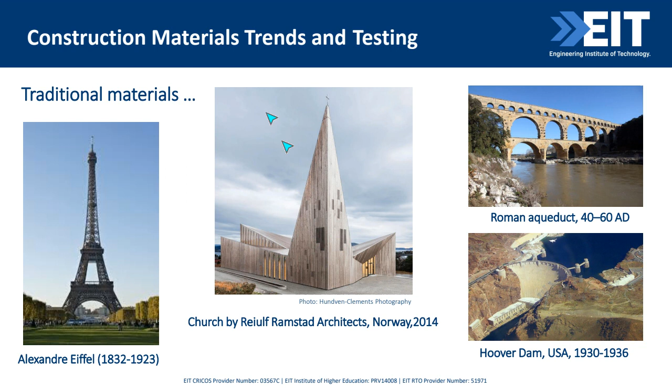This is just to give an idea about how traditional materials can evolve over time. New technologies in this area are coming every day. That's why we need to work collaboratively with our colleagues, architects, so we can come up with very special types of design. Our main idea when talking about materials: on one side the design aspects, and on the other the selection of materials suitable to a specific type of project.

This is the reason why, from my point of view as a civil structural engineer, we need to understand material characteristics, material behavior, how we can evaluate concrete properties in order to understand what's going on in situ. So this is what we'll be talking about.

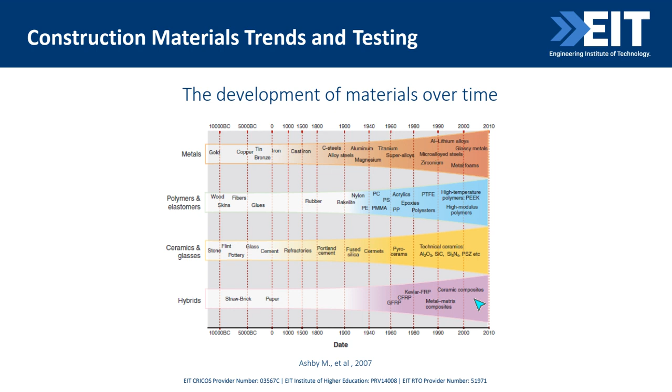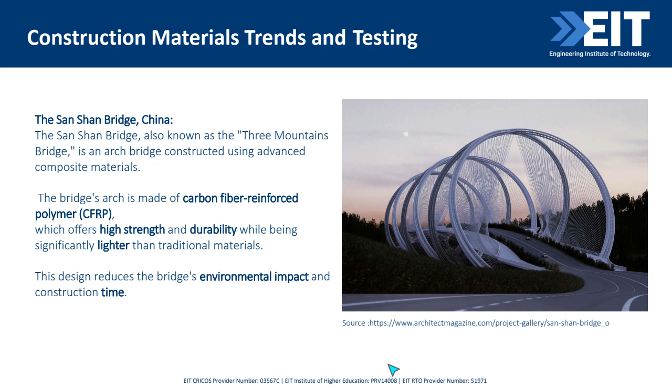Here we can see it's about offering high strength and durability, but we need to think about the weight of the material - otherwise we cannot accommodate this type of design. Another point we need to think about when selecting materials is more and more about environmental impact and construction time. These are our main challenges as engineers nowadays.

So we have a huge responsibility here about building up sustainable infrastructure. Another point I really like is sustainable cities and communities. When you think about sustainable cities, more and more we can see around the globe in different countries issues around housing, right? Demand of construction for new housing. This is our responsibility at the moment you make decisions about a new project. If you don't think about environmental impact and how you can live in a sustainable city, there's a lot of pollution, depending on the type of material you'll be working with.

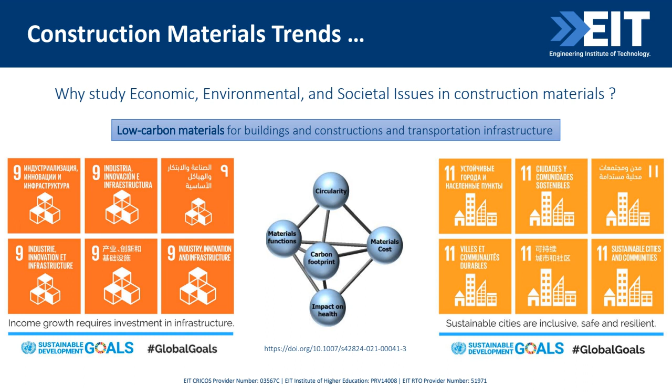So this is just to give you some initial enlightenment regarding United Nations Sustainable Development Goals. I encourage you to familiarize yourselves, because this is what we need to deal with as structural and civil engineers, construction professionals, architects. My point here is about low carbon materials for buildings and construction, and transportation infrastructure. If you only target one goal here, that's a lot you can contribute. So this is to give you some ideas about the sustainable development goals.

This is the part where I'd like to create your awareness, because with materials trends, it's about carbon dioxide emission, it's about energy. The energy sector, our industry, construction engineering - they blame us a lot regarding carbon dioxide emission because of the production of cement and concrete later on. So when you study construction materials and engineering materials, applicable to civil, mechanical, electrical, if you want to work out the entire life cycle of your product, this is one of the key points: embodied energy. I'm not going to go into the details of how to calculate embodied energy, but it's an opportunity to open your mind, and later on you'll be able to dig into it.

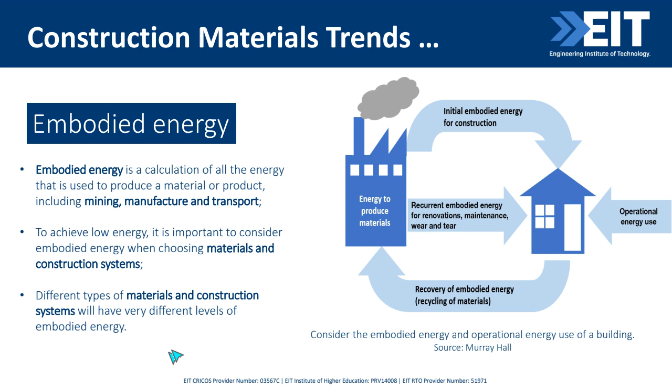So we have the initial embodied energy for the construction - here you can see the energy to produce materials. And then you have your building, with other points like operational energy use. Then at end of life, it's possible to close the cycle - let's say you have the demolition of your building. You can reuse your material, like recycled concrete or construction demolition waste. So you can mitigate and recover part of the embodied energy from your material presented at the very beginning. Different types of materials have different levels of embodied energy, but this concept is becoming more and more common when we are asked to select materials.

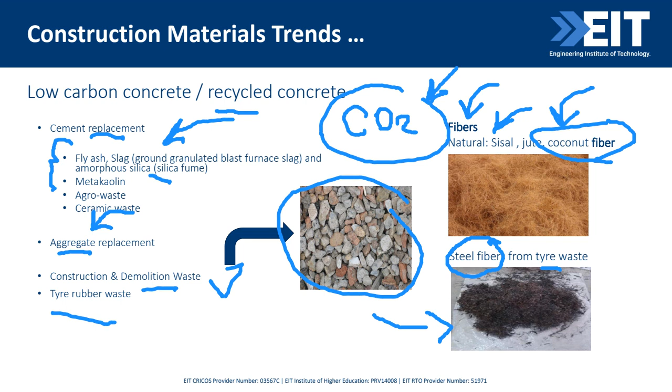When you think about concrete, you think about cracks. When we incorporate fibers in our concrete... yeah, good one, Mary, banana fiber. This one is new for me, but I will search more about it. I'm always open to receive new inputs if you have them.

All these new materials are coming to our life, to our projects, because more and more we have composites. It depends on the type of application. What is composite? For example, natural composites, when you have more than one material combined, ingredients, let's simplify. Timber is considered a natural composite. Bones are composites because they have more than one ingredient to form the final product. And we can have man-made composites.

Yes, the bonding, Sami. So composites, what's the main purpose? To combine more than one type of engineering material - timber, paper, concrete, reinforced concrete. So these are the man-made composites, and it's not new, ancient times there are some applications. Nowadays, we have modern types of composites, like fiber reinforced polymer composites.

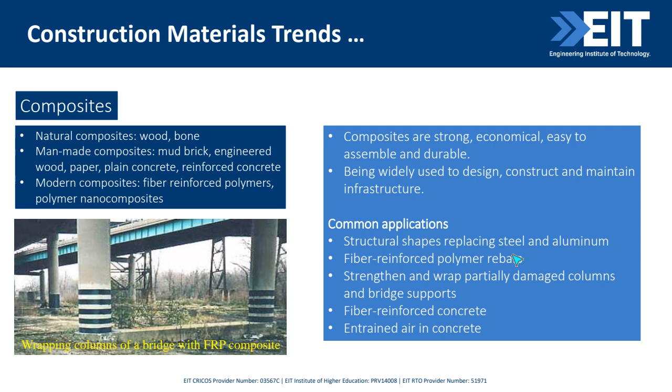It's a shame if someone asks or talks to you about a new material like fiber reinforced concrete, fiber reinforced polymer bar, or glass fiber reinforced concrete, and you don't have a clue, you don't have any idea about this. So it's always an opportunity for us to absorb more information. Regarding the trends, I'm gonna give you your answer at the end.

Okay, Raj? So here we have other trends. For now, I'm just exploring all the trends regarding use of polymers, which you can combine with cement and use in pavement applications to improve stability. Reuse of asphalt is something you can do to produce new asphalt, and definitely it's gonna mitigate environmental impact. If you think about timber, more and more we need engineered timber showing higher strength.

That's why you have this type of composite, cross-laminated timber, which can be used in buildings as structural elements. So another point - when you select materials, step number one is to understand if this application is going to have a structural purpose or not. If not, you can be a little bit more relaxed, but if there is a structural purpose, you need to double check your attention regarding the design aspects.

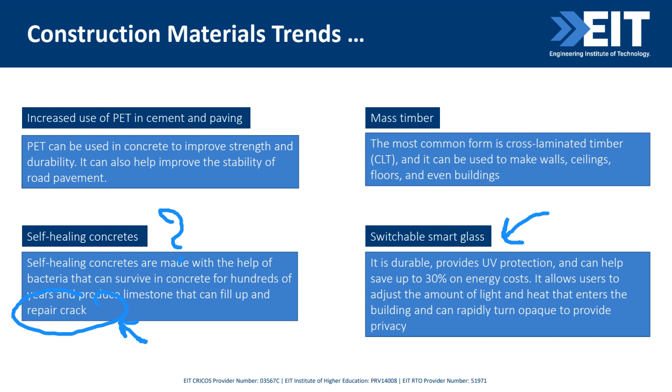And here is about switchable smart glass, another new material, very new. Nowadays our concern is about UV protection, and this also connects to, remember at the very beginning, the greenest building in the Netherlands about energy efficiency. So here you can see one of the alternatives is the application of smart glass, saving 30% on energy cost. This information I retrieved from literature, and at the end you're gonna have all the references for you to explore a bit more in your own time.

I'm not saying that you need to download standards every time, but familiarize yourself. At least go through the standards website, type the type of material you are working, and you're gonna see how many standards come up. Here is one example from the Australian standard, the concrete structure. And when you have one standard, you have so many others to refer to. So familiarize with standards all the time when you need.

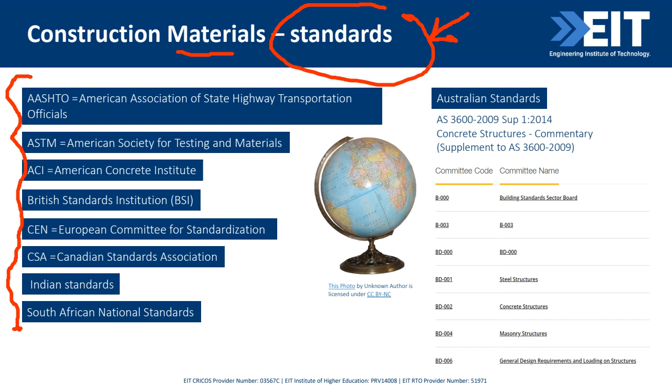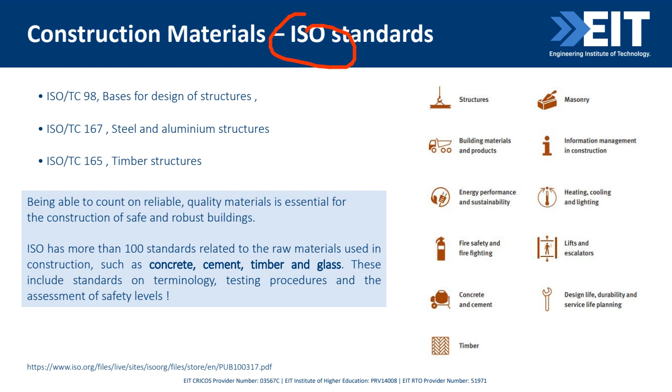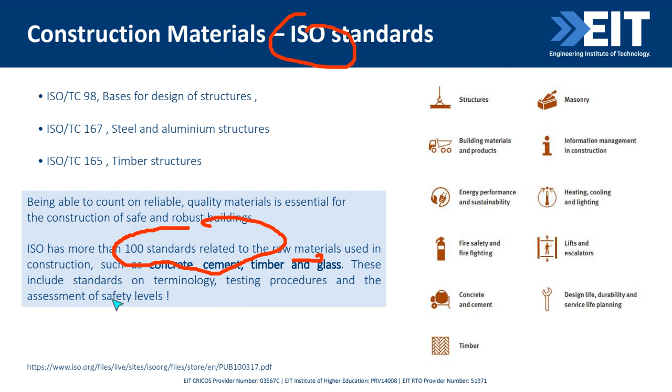And you have the ISO standards. Just to give you some idea about materials and ISO, we have more than 100 standards related to raw materials. What type of raw materials am I saying here? Concrete, timber, glass, cement. All these are available for the structures, masonry, building materials and products. I just organized it here for you: concrete and cement, timber, because at the end of the day, these standards will guide us to conduct the test and ensure the characteristics of your material. So we'll have testing procedures, terminology, and that's why we need to think about safety aspects when working with construction materials.

And talking about safety, this is the main concern, right? Materials, construction materials, engineering materials, properties. That's why this is something we'll be discussing here today. As engineers, as construction professionals, we need to know the difference, right? This is the fundamentals. When you have selection of materials, we need to know what you want regarding physical properties, mechanical properties, chemical, electrical, magnetic properties, thermal properties, for example.

And this is a very interesting diagram, if you can see here. It's normally when you have more than one property, we can think about correlations. Remember at the very beginning I mentioned the materials family, metal family, ceramics, and here we can hit technical composites, hybrids, polymers. So when you need to select materials, here is an example when you have modulus of elasticity against density. So depends on your project design.

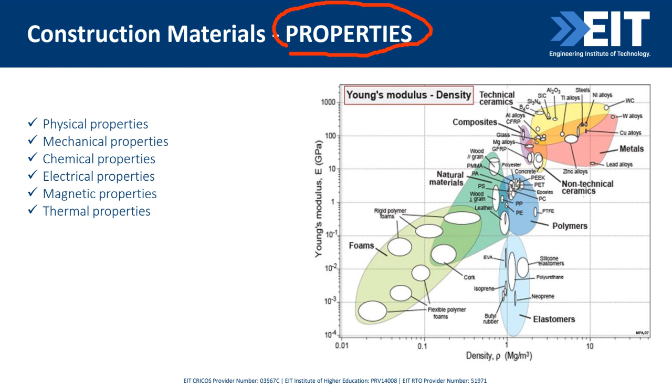You need to familiarize with this type of diagram regarding if you're looking for a lighter material but showing high Young's modulus of elasticity, right? So this is quite difficult. Pretty much when you have here the metal families, the alloys, what we can see is higher density and higher modulus of elasticity, if you think about the design. So I will not go further with this. It's more to explore what type of properties we need to familiarize ourselves with.

And here are some examples when you have thermal properties. Here we can see very common, sometimes we need to think about the thermal loads in our project, and that's why we need to understand materials, which one shows high conductivity, lower conductivity. So it's important to characterize materials against thermal properties, and here chemical properties.

Chemical properties, I understand, majority of times civil construction professionals, we don't like chemistry, right? So chemical properties are critical. We need to like it more than ever because it's about durability, deterioration, okay? So let's say here, we even need to understand the properties of water as a material if you are producing concrete.

This is my favorite, that's why I'll talk about this one. Salt water - do you think it's a good idea to add salt water in our concrete if you're gonna work with reinforced concrete? Do you think it's a good idea? Yes or no? No, definitely not. Okay, and why? This is the next question. Why? No, right? Definitely not.

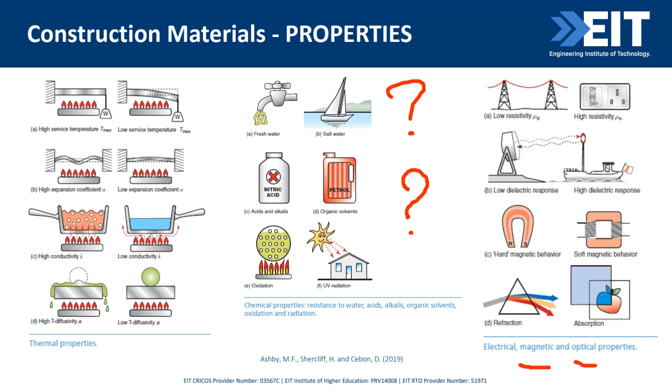And we have also magnetic properties, optical properties. All these characteristics are important. Corrosion, definitely.

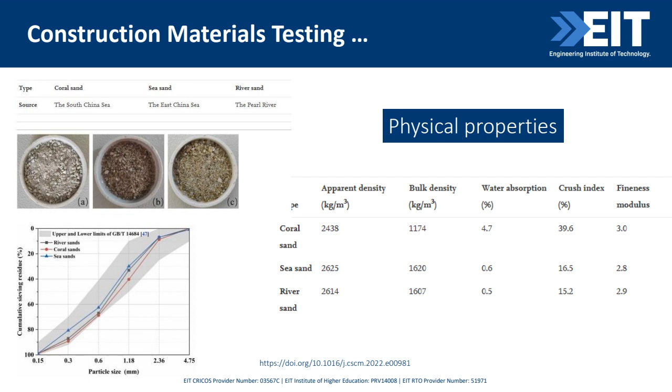When you work with sand with high level of water absorption, the sand absorbs water, and then you need to adjust this at the moment you are mixing concrete, to not add more water into your concrete. So that's an example of why we need to familiarize ourselves with testing.

The other one, let's have a look at the chemical properties. And same here, as we discussed before, we have all the oxide compositions here. We have Portland cement, coral sand, and sea sand.

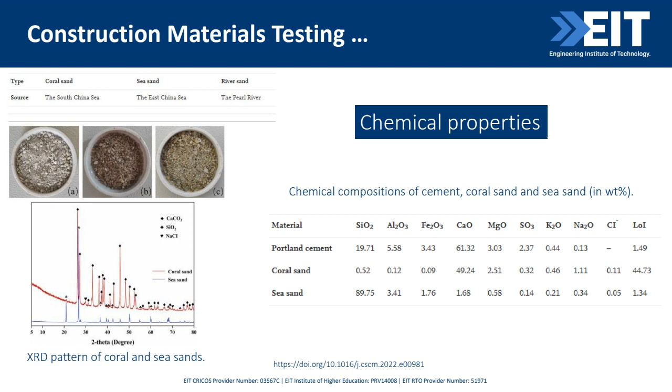Why is it important? Because we don't want chemical reaction between Portland cement and sand. We used to say aggregates are inert, meaning no chemical reaction. So by doing this type of analysis, we need to work collaboratively with our colleagues, chemical engineers, and then we can understand which material is most suitable for our project, or not. This is the point when covering these chemical properties, and this can also influence the durability of your concrete later on.

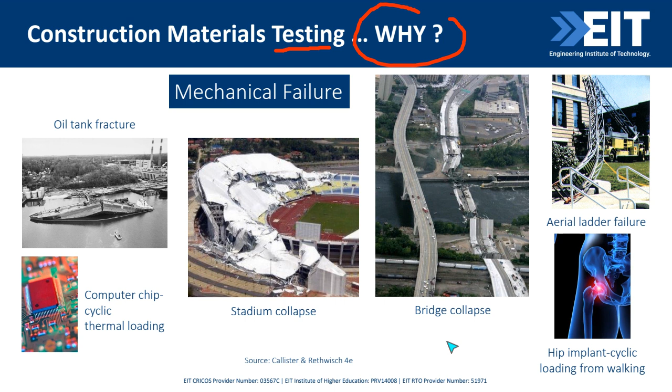Now we come to one of the main concerns: why we need to be concerned about construction materials testing. Because we don't want mechanical failure. There are so many examples around the globe in different countries: stadium collapse, bridge collapse, oil tank fracture. Even with these types of failures, some can be predicted, but some not, like a natural disaster. It is our job now to design more resilient structures to cope with natural disaster.

Not easy, but step number one when selecting materials is about mechanical properties. When you talk about failure, straight away it comes to mind. This is a huge question - some of you are totally familiar with this, some maybe not. But how do materials break? It's simple: if you apply load, a material with enough strength will not break, but after a certain level of load, the material will break. This is the example of a compressive test with concrete, and how materials break.

When we do compressive strength testing, we apply load, and what we can see is the cracks are formed and the load increases until a certain level. When you do this type of test, we are concerned with the material's behavior.

Stress strain diagram - you are familiar with this, right? This one is for concrete. Let's say you apply load, you can obtain displacement, vertical and horizontal. From the vertical displacement, you can calculate strain. So you apply load until a certain level, you have the linear behavior, and then straight away after the maximum point load, maximum stress, you can see the collapse.

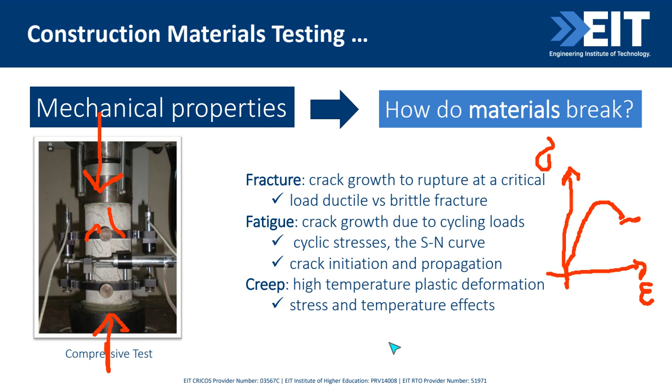Why is it important? Because by doing this type of analysis, even with the simple compressive strength test, we can identify if our material is a ductile material or a brittle material. And other characteristics like fatigue and creep, we need to observe and understand how materials break.

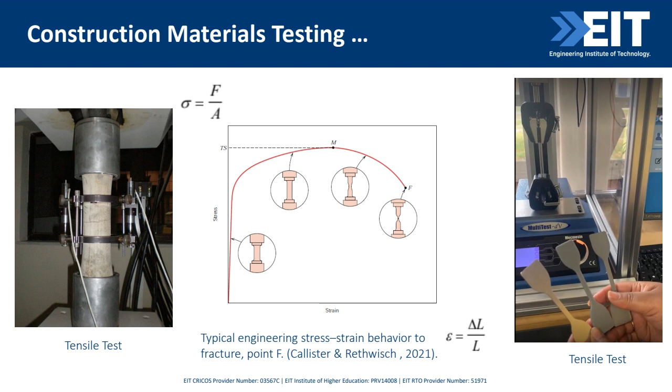Another type of test, as Fred mentioned, is the tensile test. There are specific samples, as you can see here, depending on the type of material. We have specific equipment and samples that we can use. By applying compressive load or tensile load - as you can see here, this is tensile load in concrete - this is the direct test. It's very hard because you apply direct tensile test; not very easy because we need these special types of devices.

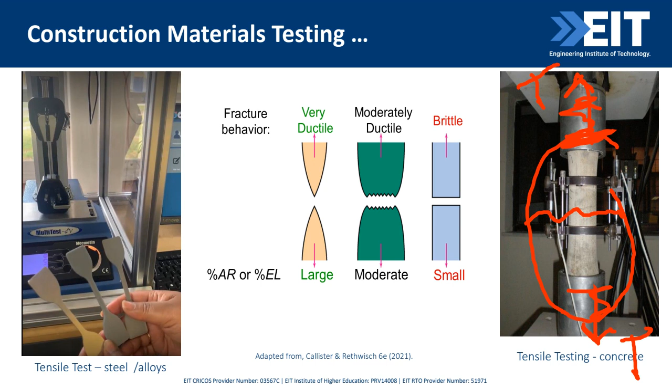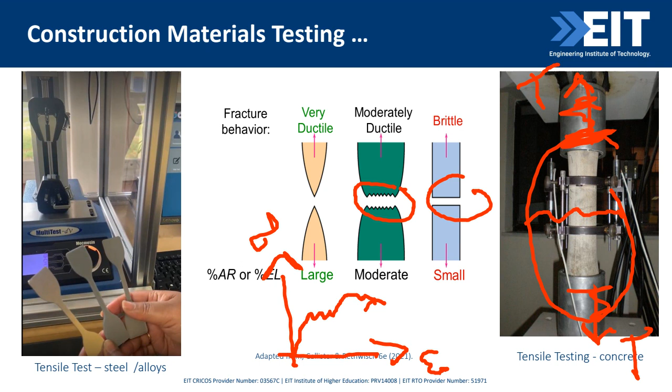When you have steel, we have the yielding point. For steel, when you conduct this type of stress-strain test, normally you have the linear part, the yield, and then the collapse. This gives us the idea: brittle material, straight away you have the fracture, you don't have time to run away, the material will collapse. Then we have moderate ductility, more or less with concrete, and very ductile, pretty much steel. These are the things we needed to familiarize ourselves with.

Yes, this is ductile, and this is the type of brittle failure. This is why we incorporate fibers in our materials, in our composites. Here is the example of concrete, because we need a more ductile material - this is the main purpose when we incorporate fibers into our composites.

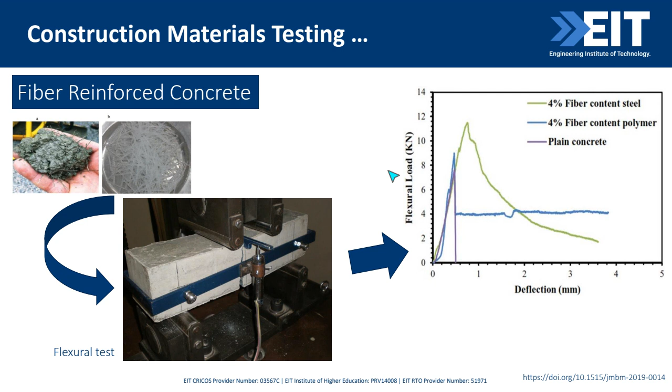Definitely, Rafi, this is our main objective when incorporating fibers - with the previous one, concrete, you can see this very thin type of composite. This is the main point, and you can use what is available: tyre waste fiber, coconut fiber depending on your country, or from the Amazon forest, jute or sisal.

And its flexibility is, when here we're talking about the bending test, instead of flexibility, we obtain flexural strength. Exactly. Thank you for popping up.

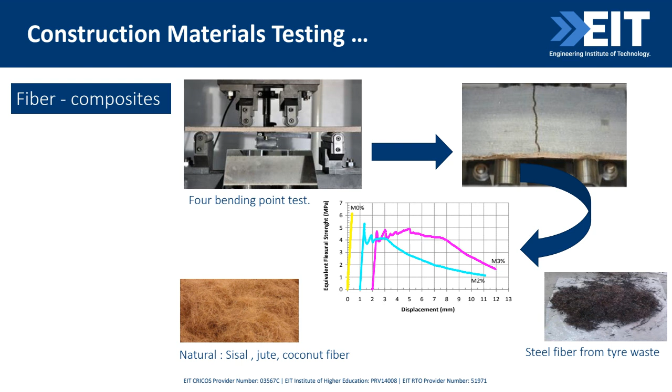Amazing. So what we have here at EIT is our remote lab. More and more, definitely we can go to the lab and conduct this type of test if you're doing research. But at the moment you are learning how to conduct this test, we can use the virtual labs - I won't do the entire demonstration today, but I'm going to show you step by step what type of information we can collect.

Remember the compressive strength test, when you have the cylindrical sample and you apply compressive load. We can do this just to learn how to conduct the test, right? You can do this using the virtual labs.

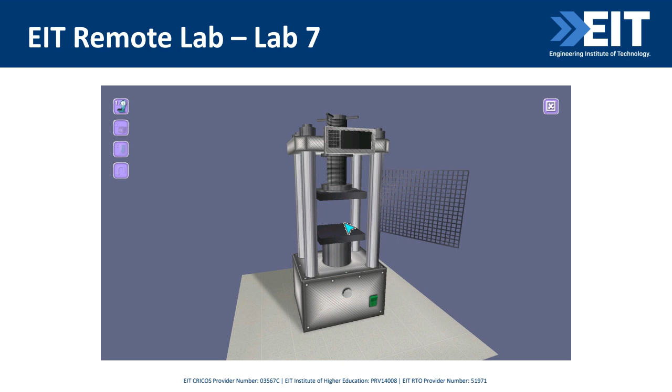And it's quite interesting because the virtual labs, as you can see, are safe. First step, it's very safe because you cannot hurt yourself. And then you can see all the safety procedures here - we need to be protected because you're going to add your sample here in the virtual machine.

What we can do, in order to learn this virtual lab, they provide us with different concrete mixes, and by doing this we can select if you want to compare different concrete mix, compressive strength at 3 days, 7 or 28 days. So here you can see, depending on what we're talking about with concrete, we can plot the strength development gain over time.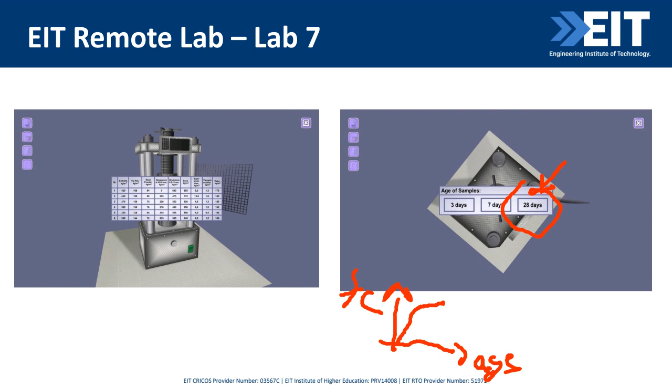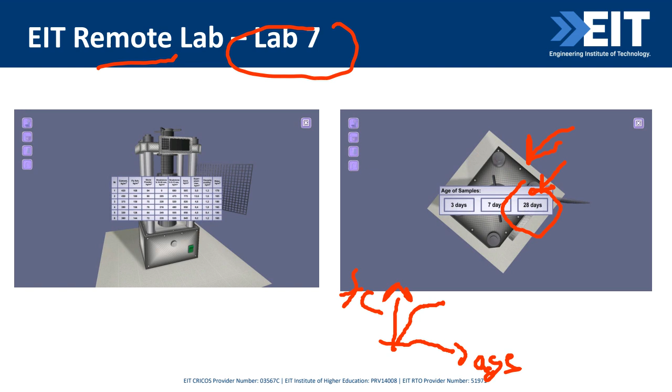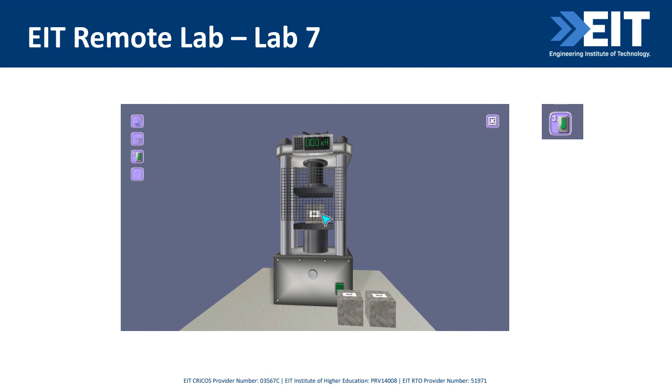For example, here you can see we have the concrete samples - depending on your country you can use cubic samples or cylinders, but virtually you can just grab the sample, put it into the machine and apply loads. At the end, we can observe the load here and take notes. So this one is definitely targeting learning how to use this, and then about analysis.

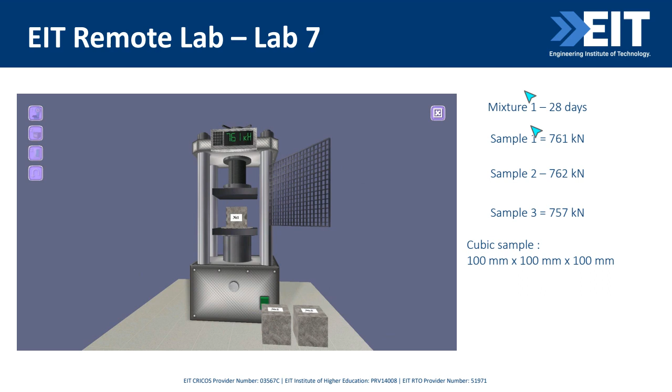Let's say for this example I just got mixture one and selected 28 days, but I can do the other days, 3 days and 7 days for this one. And now we have the cubic sample, and we can calculate the strength for the 3 samples. So this is the type of activity we can conduct to offer some practical and hands-on activities to our students.

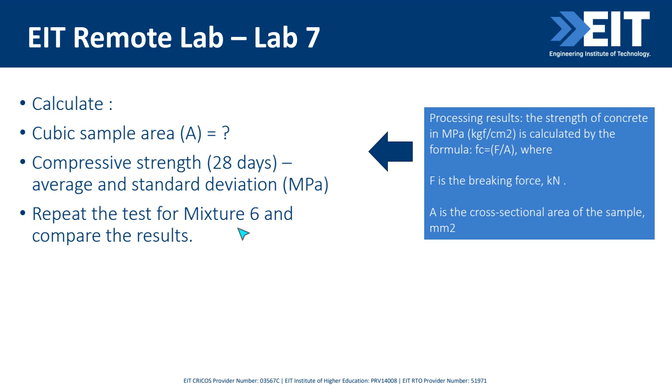And we can, as I mentioned before, have 6 mixtures - we can play with these mixtures in a safe way. This is one of the points, just to show you how we can improve, how you can train and practice before going to the physical lab and doing your job.

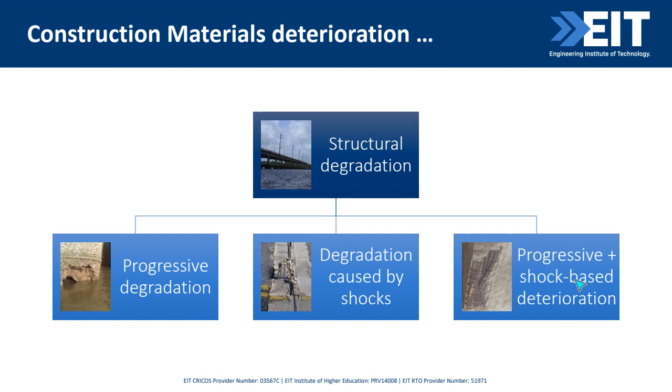And we talked about the properties, and we're going to be finishing soon. It's about deterioration - we need to understand the chemical properties. Mechanical properties now we are clear: compressive, tensile, flexural. And now we need to understand materials degradation - when we study durability and materials testing, we need to understand progressive degradation caused by shocks, plus shock-based deterioration.

This is a very interesting area, because you never know - you have the opportunity to work as a forensic engineer. Something is not going well, or some part of your structure collapsed, and we need to understand and figure out what happened. That's why this gives an idea about planning and conducting an in situ inspection.

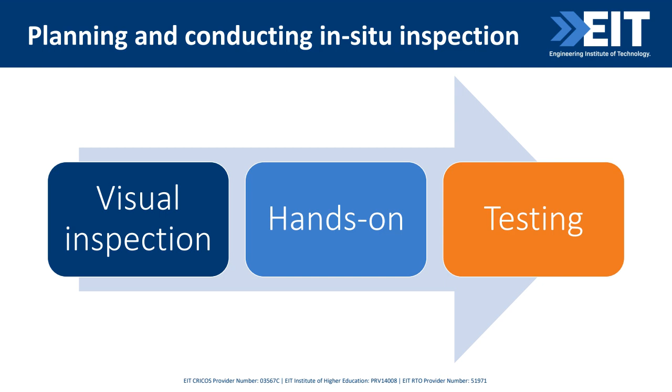You have 3 main stages: visual inspection, hands-on, and testing. It's all about testing - materials is about testing. And when you talk about testing, we have 2 main alternatives: destructive, as you could see, unless we're doing it virtually in our virtual lab where we can destruct and reuse, but in real life it's like this - destructive means we cannot reuse our sample, the sample is destroyed. The other one is non-destructive. Are you familiar with non-destructive tests?

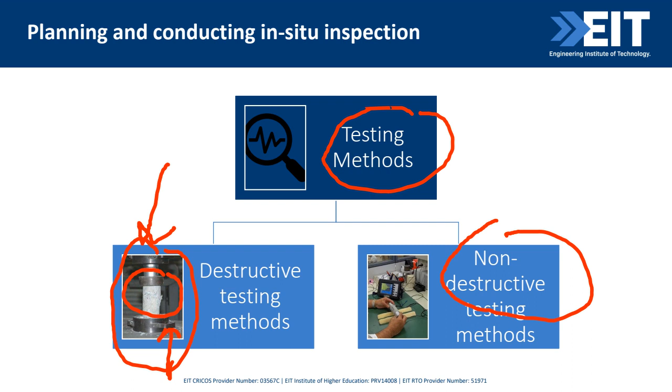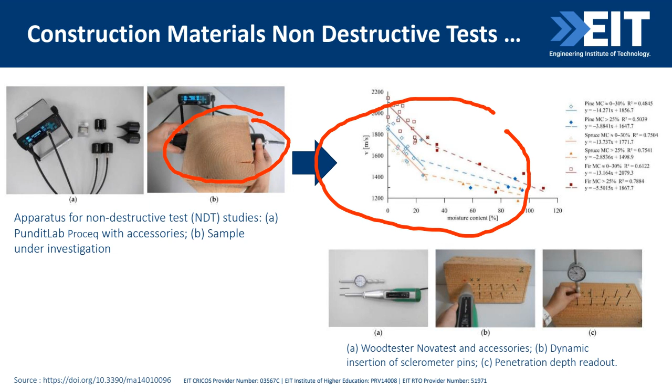Have you heard about an example like this one, the ultrasonic pulse velocity, Schmidt hammer, rebound hammer? So this is, as you can imagine, very useful. You can apply this type of test to timber, so you can have understanding about what's going on with the timber species. Rebound hammer, Edmund, here is an example of this type of test that could be used in timber. Another point here, ultrasonic pulse velocity.

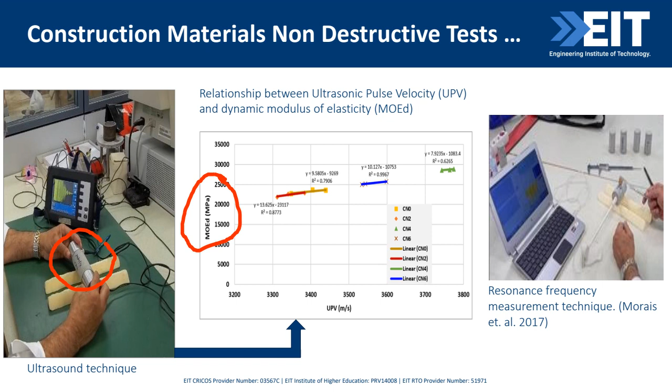Here is an example when we worked with carbon nanotubes, and then we'd like to understand the modulus of elasticity of carbon nanotubes. Even in the lab, we can use the ultrasonic pulse velocity. And the other one, resonance frequency.

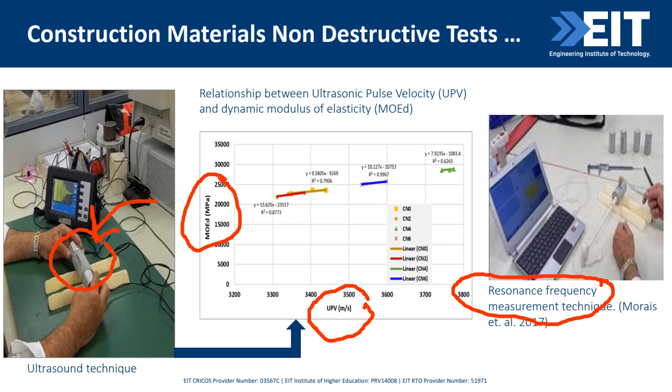So these are the alternatives we have in order to get a better idea about materials characteristics, and we don't need to destroy the sample. When you do this type of test, normally this is more to compare. We have the pros and cons. According to the standards, we can evaluate.

Normally nowadays there's more of a combination when you combine more than one type of test, like ultrasonic test plus Schmidt hammer. Because Schmidt hammer is about what's going on at the surface of concrete, like a hardness test.

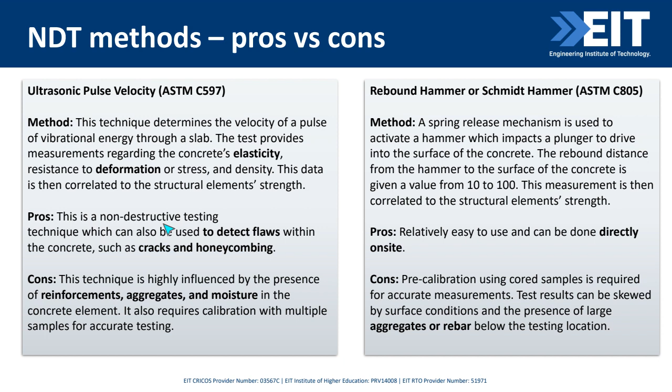That's great, Sammy. I really like this one. I worked a lot on it during my thesis. And this one is a pop-up quiz for you.

Just let me know, what is the pH of hardened concrete, in order to ensure that your steel bars are protected. Can you recall this? This is more to memorize, right? The pH of concrete. And then we can move on.

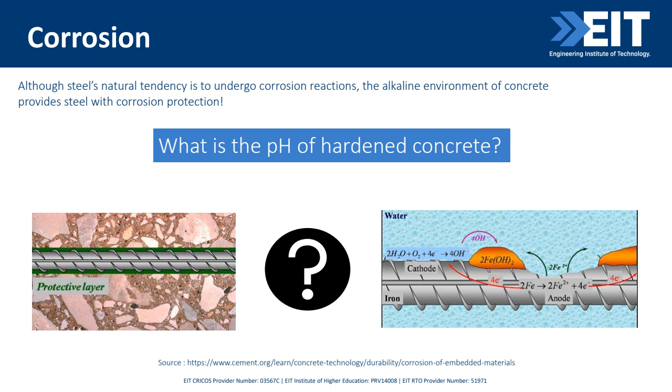I don't go into the details of this, but to illustrate that we have a variety of tests that we can conduct in order to have a better evaluation regarding corrosion when you are working with steel, pretty much reinforced concrete or pre-stressed concrete.

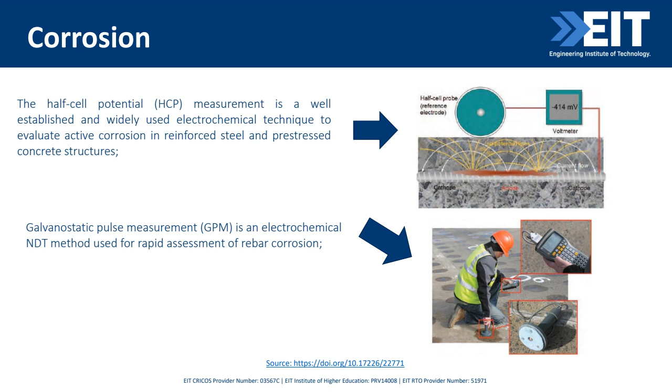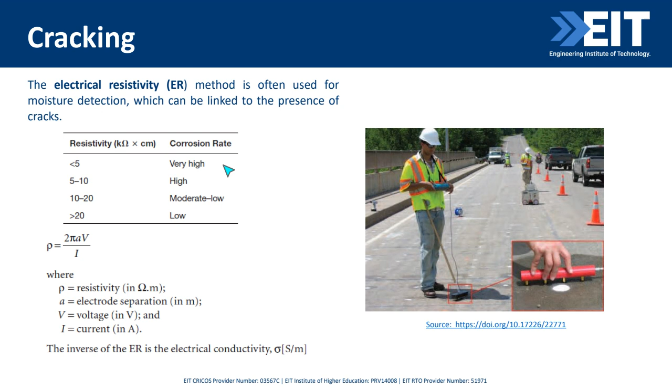The other part here, it's about other types of tests that we can conduct because cracking is another headache. Electrical resistivity test, it's an in-situ test, regarding the possibility to detect the moisture of your concrete. We can also link it with the presence of cracks. So this is also to understand if you have cracks, the corrosion progresses at a fast pace, right? That's why resistivity gives us an idea about corrosion rate.

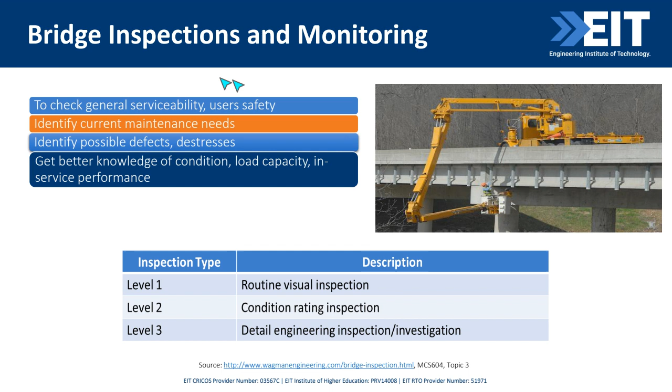So again, it's just to illustrate. Depending on the opportunities you'll be working with, like this example here, in order to inspect and monitor a bridge. So we have, this is another area, monitoring that you can explore, but the fundamentals to move on and be an expert in this area is to start with the fundamentals of construction materials.

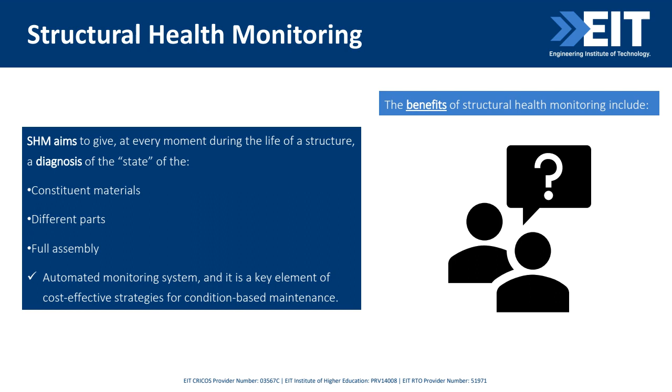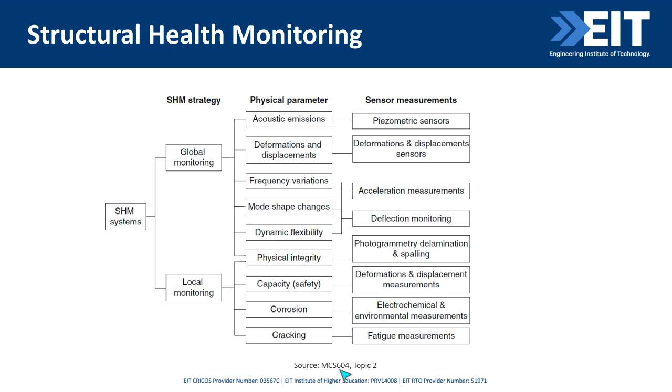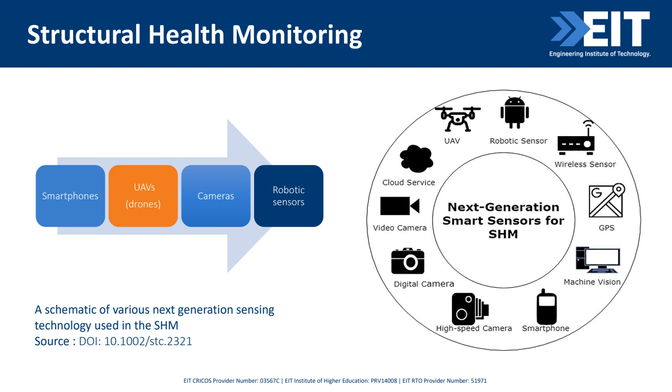This is part of one of our units, master course. Here is more to illustrate what type of new technologies we have around this topic, structural health monitoring. You have drones, digital cameras, smartphones, integration of these technologies in order to ensure that the monitoring is done properly.

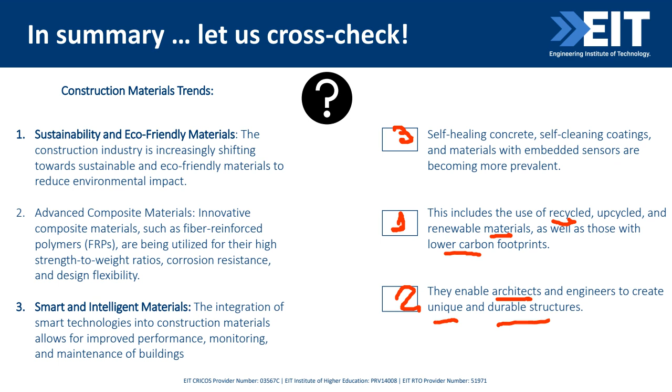And just to give architects some possibility to innovate and create unique designs. Yeah, this is definitely number 2. So it's good to know that you all are awake and keeping an eye on the slides.

And we have more now regarding testing. So there is another one that I want to cover, about mechanical properties. Let's start with this one, about mechanical properties.

What do you think? We talked about mechanical properties, durability, non-destructive tests, and environmental impact assessments. I'll give you some time to put them in order. The first one is evaluation without causing damage, right? Definitely, we don't need to destroy our samples. That's about freeze-thaw resistance, corrosion resistance, and weathering. So what do you think, number 2, number 1, number 2? Thank you. And materials properties through their life cycle, like energy consumption, recyclability, carbon emission, environmental impact assessment.

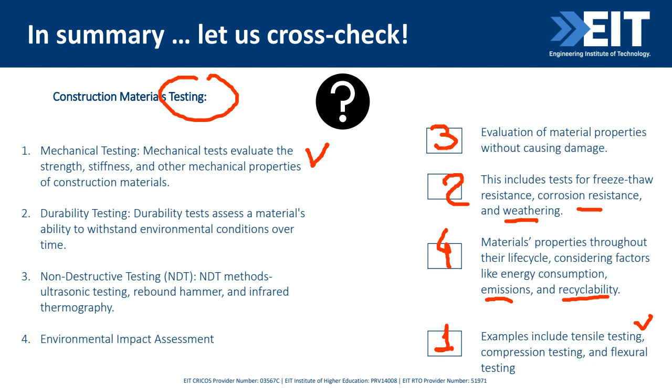Examples - yeah, this is the last one, right? Number one, yeah, you nailed this. Thank you very, very much for your attention. Here you have some very good references that you can explore a bit more later on. I tried to summarize as much as I could to share with all of you today. That's great, isn't it?